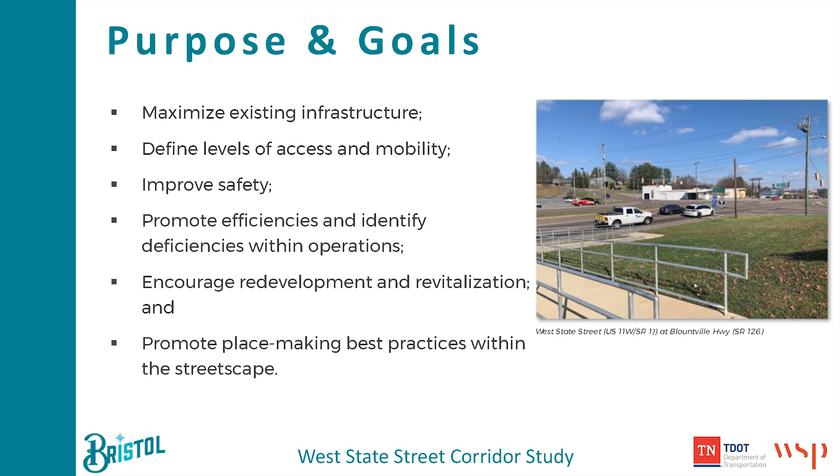All right, good deal. So next up, we're going to talk about the purpose and goals. So Bristol, when they were putting together the request for this funding, really looked at what they wanted to accomplish, including maximizing the existing infrastructure, defining levels of access and mobility, especially for alternative modes of transportation, improving safety for all users of this corridor, whether pedestrian, cyclist, or motorist, looking at ways to increase and promote efficiency, and identifying deficiencies within the operations of the corridor. That usually deals with things like traffic signals and turn movements, looking at the opportunity to encourage redevelopment and revitalization of West State Street, especially as you move outside of downtown and the in-between land between Interstate I-81 and the downtown core. And then also wanting to promote placemaking with best practices within the streetscape. What are the things that we're seeing in other communities that really work well to make streets functional and safe and also interesting for people?

Here's our next question, and I promise we will have more space between the next question. But you can see here we are asking you to choose a couple of options of your top 2 goals for West State Street. All right, answers are coming in.

I think this is particularly satisfying as someone who works with the public to see that sort of immediate response. I hope you all feel the same way. So redevelopment, streetscaping are the items that are kind of hitting the top of the list in the choice of options there. Looks like we've slowed down, so we'll go ahead and move on. But thank you all for participating. Like I said, we wanted to get a couple of these out early, and then we'll have some later on as we talk about our options. All right, let's see here. Yes, fantastic.

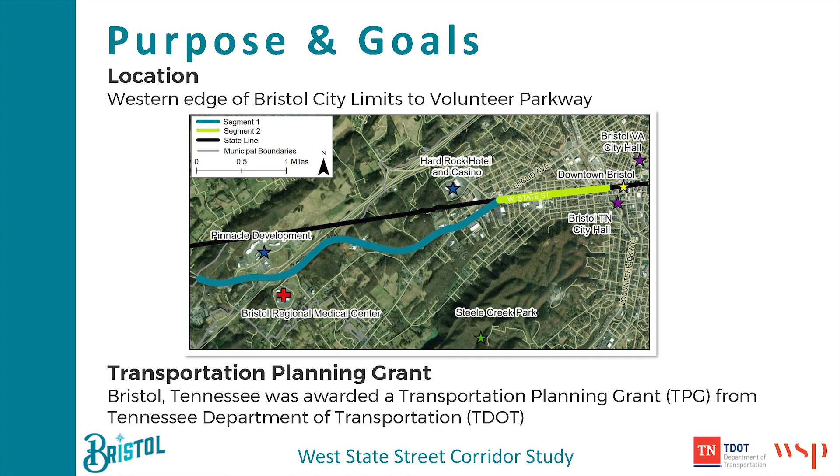That's a lot of acronyms, but when we refer to 'the city' during this presentation, we typically mean the city of Bristol, Tennessee. If we refer to Bristol, Virginia, we will try to note that. Similarly, that's how it is in the draft plan, which went up online earlier this week. So if you'd like some fun, not bedtime reading, we'd encourage you to look up the draft report available online for comment.

All right, just making sure I'm tracking on the right screens here. Give me one moment. All right, so we're going to jump into the analysis and existing conditions that we looked at for the corridor.

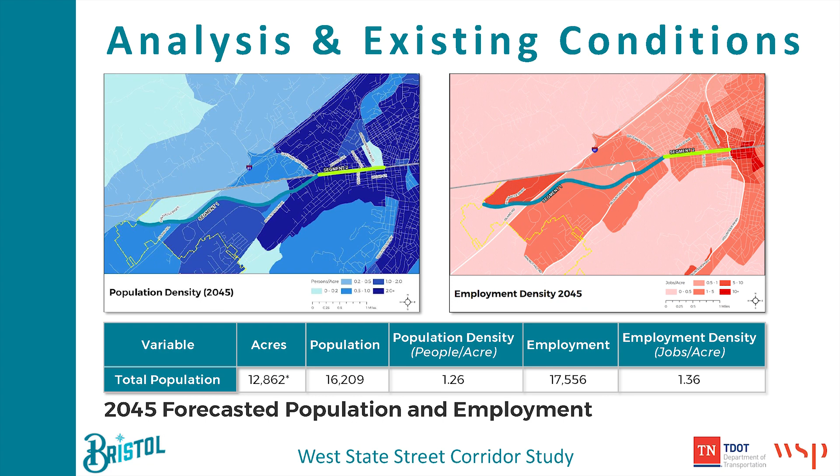And I assume also Virginia. But also for employment, we are planning to see an increase, going from just under 1 to just over 1 in terms of density. So you can see how that breaks down between existing population and future population.

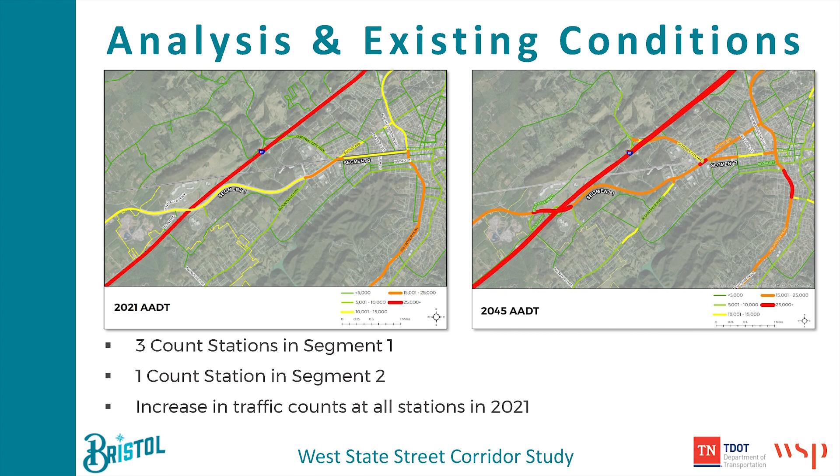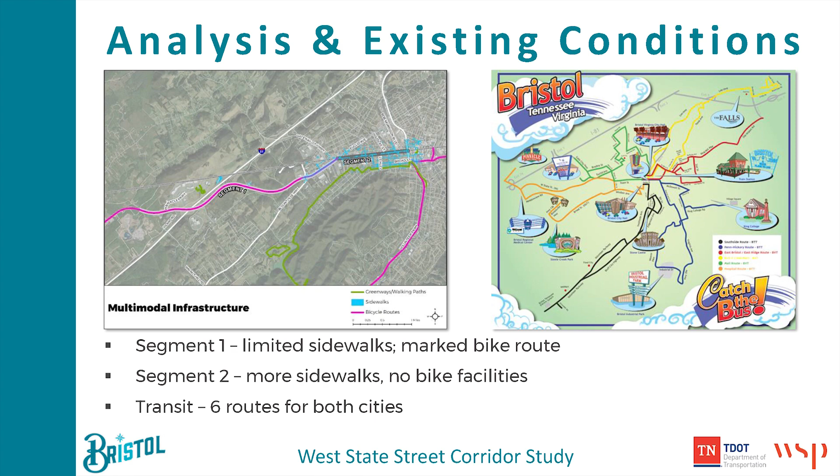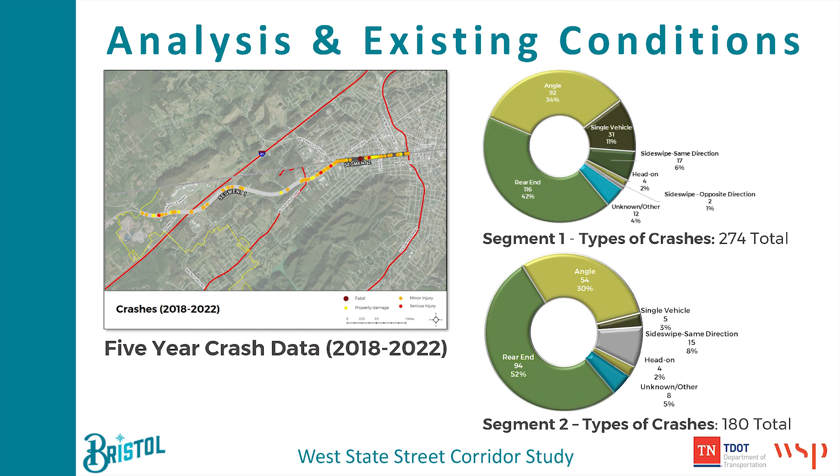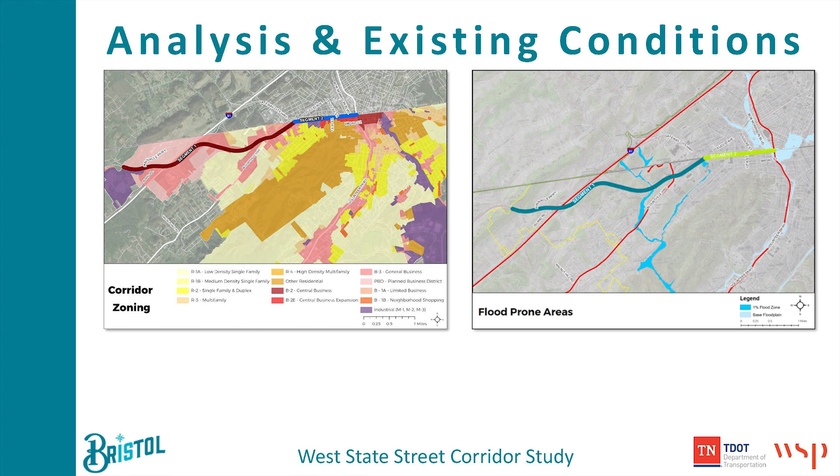You can see some of the water with some of the creeks, and also just the fact that Steele Creek Park is pretty steep, and some of that steepness follows segment 1 and can have an impact and limit development potential as you all consider future uses. So those were things we took into consideration as we looked at analysis and existing conditions.

All right, now we're going to turn to our public engagement.

We really appreciated both Sheriff and her staff working to bring stakeholders together. We met with them in late October of last year to talk about what they saw as opportunities and concerns for the corridor, and we had a great amount of participation from both city staffs, TDOT, VDOT, developers, business owners, Believe in Bristol, Advance Bristol, so a lot of good participation from a variety of folks.

They came to the table and said that what they'd really like to see is some more uniformity and character throughout the length of the corridor, increasing safety for bikes and pedestrians, making sure folks know where they're supposed to be and how to travel safely, making sure pavement markings are clear, visible, and intuitive — that was some of the commentary we heard.

And then there's a lot of aesthetic improvements that could be made, both in the public realm and also in the private realm with regards to mix of uses.

Parking was mentioned as an issue for segment 2, particularly crashes with parked cars. I think that ties into some of the marking issues with the street — sometimes people aren't prepared for how lanes shift, and therefore there's some confusion.

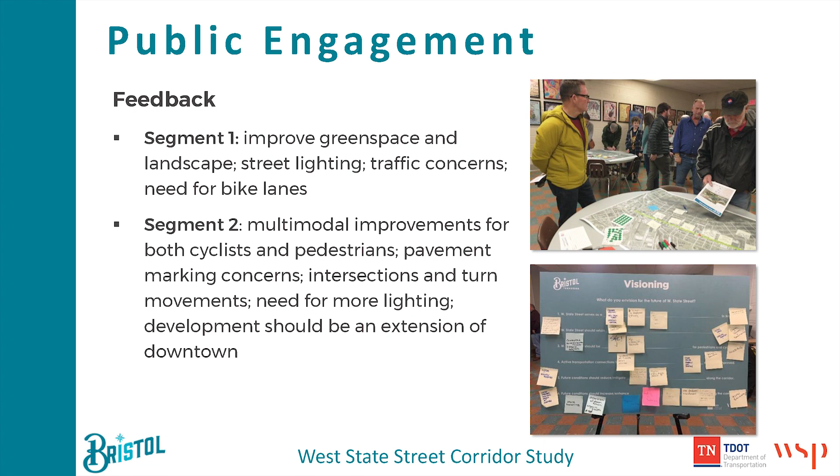And then in segment 2, multimodal improvements for both cyclists and pedestrians were highlighted. Pavement marking concerns — I think you'll hear that again and again. And then intersections and turn movements were somewhat confusing, so if there were ways to bring clarity to that. Again, need for more lighting, and then that development should be an extension of downtown, and you can see the image there in the bottom right.

It shows the visioning board with lots of different ideas added to those open-ended statements where people could share their thoughts and ideas about what should happen.

So with that, we actually went ahead and did an online survey following the public meeting, and that opened in February of '23, specifically the 13th, right before Valentine's Day. It was promoted through the open house back in November, and also on the city's social media, and we were thrilled.

We had almost 500 participants in that survey, and that's just great public participation, which really indicated to us that people care a lot about West State Street and what it can be and what it should be as a spine in this community.

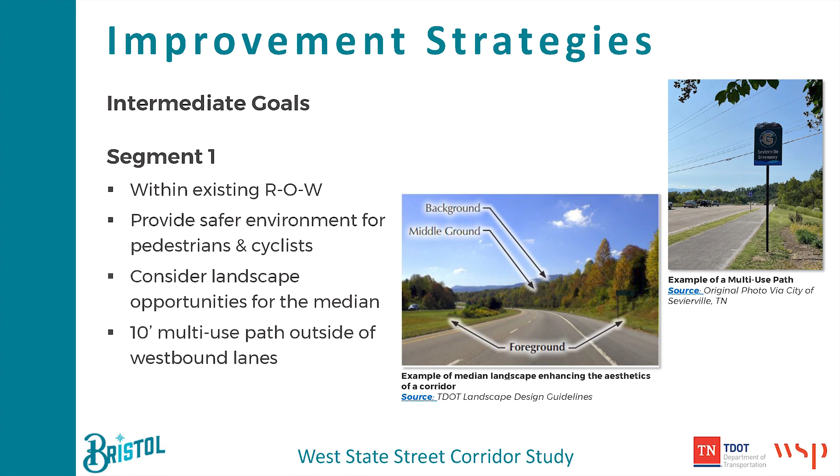As you dig through the plan, it's going to get super technical. In the body of the plan, we provide some illustrative plan sheets and cross sections developed in concert with our project engineer. We did not include all of these in the slide deck because you'd have to go through a bunch of plan sheets in the presentation, but everything's available in the appendix.

So essentially, what would a 10-foot shared use path look like along segment 1 that would allow not only movement of pedestrians, but also two-way bicycle movements? This is just an illustrative example of what it might look like near Pinnacle Parkway as you're heading eastward towards I-81.

And then again, what would that look like as you head towards Island Road? I think I'll breeze through these really quickly, but maybe give some love to that section right here.

If you guys can read it, I'm not sure if you can see it based on the resolution, but if you still have your Mentimeter up, the slide should automatically go to this slide that I'm on right now, and you should be able to zoom in. So you'll see 2 12-foot travel lanes, a grass median in the middle, 6-foot shoulders on the side, and then a 10-foot bi-directional shared use path separated from your vehicles, that are traveling potentially faster than the speed limit, by a buffer.

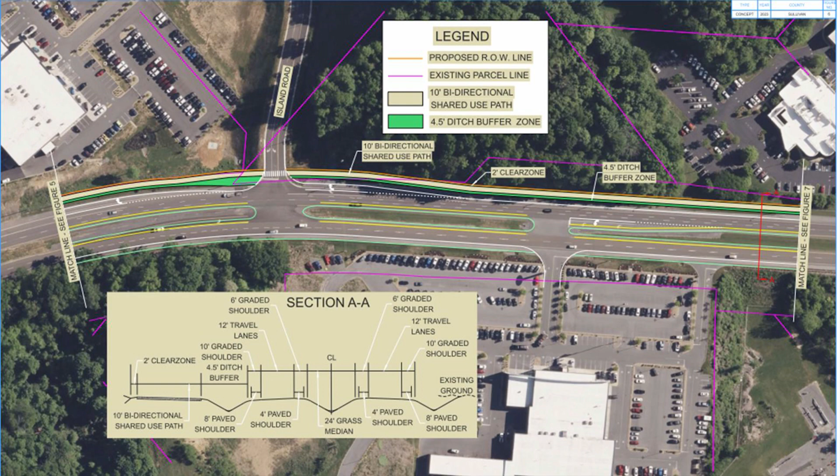And then in the project recommendations that we have as part of the study, we knew that the sidewalks begin on segment 1 of West State Street in and around that Toyota car dealership by Blountville Highway right there. We have a recommendation to kind of continue that shared use path through that. There's nothing that would preclude the city from weaving into the existing sidewalk that begins there, which would provide a little additional cost savings.

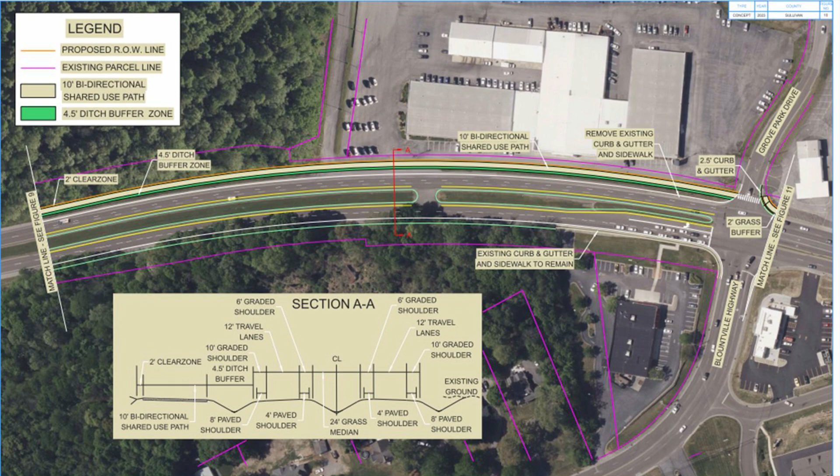Perfect. I guess I'll stop to see if there are any questions, comments, or concerns on how we're thinking about segment 1. I think you saw during the technical analysis, we're not expecting any significant traffic or congestion issues along that segment in the future, but what we did here was a desire to increase multimodal infrastructure along there while also retaining capacity. So implementation of a multi-use path that would allow not only your spandex riding bicycle riders, but also your families to get to the Pinnacle safely if they want to go for a bicycle ride. Does that seem intuitive to anybody? Does anybody have any questions, comments, concerns on that?

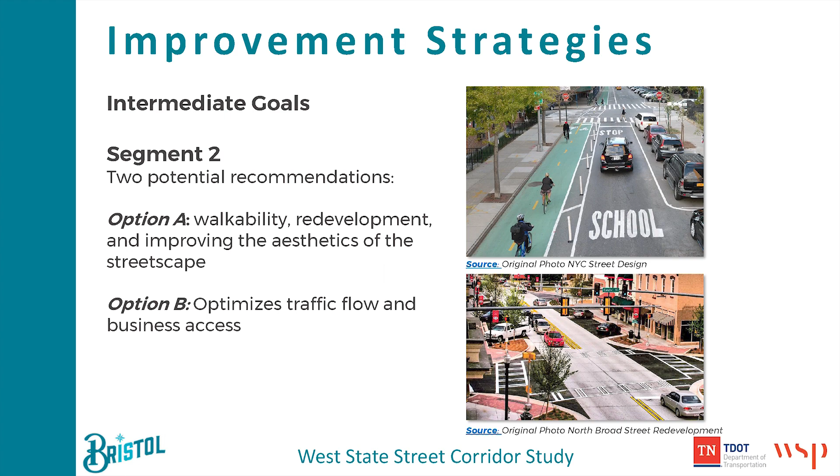So what you can see on the screen right now, there's only going to be one for option A and one for option B, is what that plan sheet and that typical section would look like. Again, this was a planning level effort, kind of the beginning of conceptual engineering, thinking about it, telling us whether anything we're saying can never happen, and rooting this in reality.

So what you see here is a retaining of the existing sidewalks along segment 2, or widening them to 5 feet if they happen to be narrower. Maintaining 2 through travel lanes in each direction that are 11 feet, which is typically feasible for your transit vehicles and freight vehicles, a little bit of a pinch. 10 is usually the minimum, 11 gives a little bit more love to your delivery vehicles and transit vehicles.

And then the most important thing, or the very different change as part of option A, is the implementation of what we call a 2-way cycle track along segment 2 of the corridor, which could then weave into the 10-foot shared use path in segment 1 as somebody heads westward. That 8-foot 2-way bike lane can serve bicyclists in both directions and would be buffered from your travel lanes by about 2 feet, so they can feel a little safer, a little less stressed driving on that type of roadway.

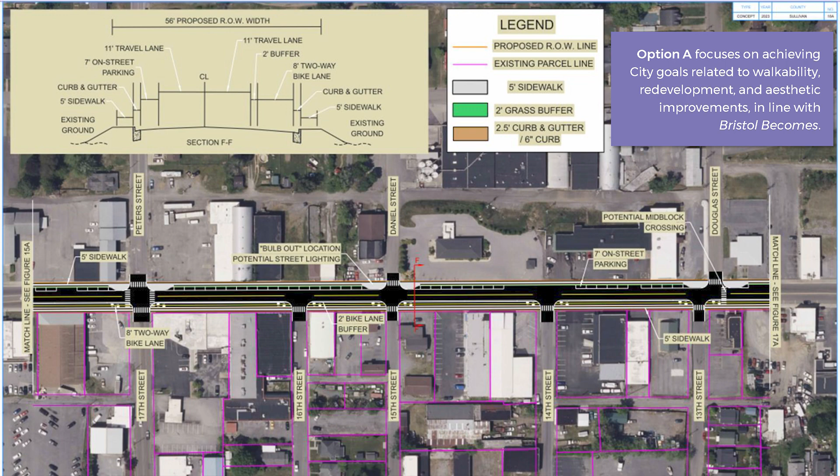All right, so what would your option B look like? Option B focuses on optimizing your traffic flow, making sure that your vehicles feel like they can reliably move through segment 2 safely.

And I would be remiss if I did not mention that both of these options retain on-street parking on at least one side of the roadway. We heard a desire to retain some on-street parking because people like to be able to park right in front of the door of the business they're trying to go to. So that's what that typical section shows right there, you can see the on-street parking.

And then you'll also see some strategic, what we call bulb out locations. They'll be in the gray on that area that you'll see. This is really an opportunity to provide landscaping, streetscaping, beautification improvements. You can provide ornate pedestrian scale lighting here, ground cover, colorful shrubs. You can work with TDOT's landscape design guidelines to tease out what that could look like in the future.

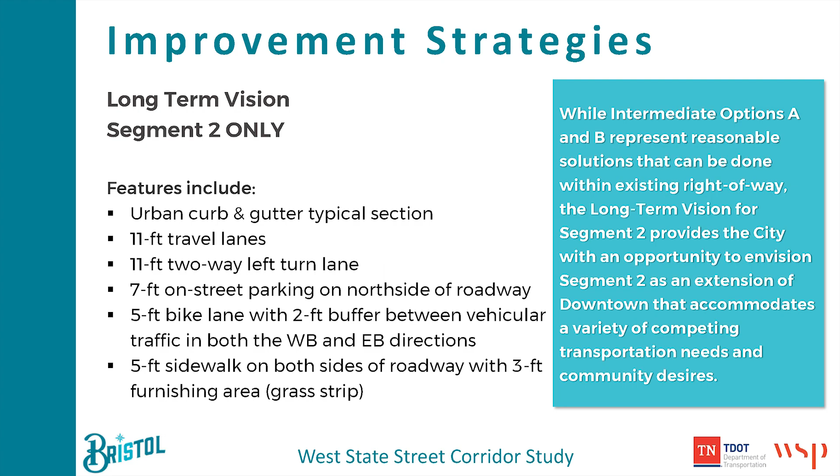So that's what it would look like here. You can see the typical section, the center turn lane with the 2 travel lanes in each direction, buffers to your bike lane. It might be a little hard to see, but it is in the report online, as well as the sidewalks, which would now have a buffer before the curb and gutter.

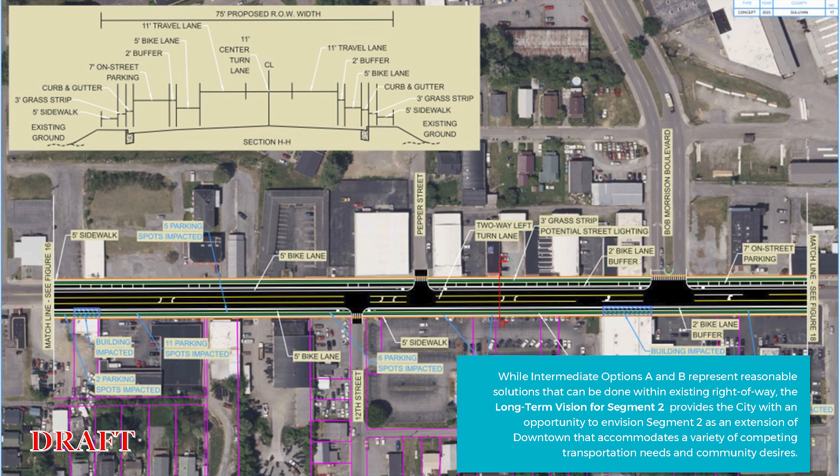We're good. And then this is essentially what that would look like as you approach Euclid/Gate City. We do retain some of that on-street parking.

This obviously would not preclude the city from maybe saying, hey, we don't want all those parking spots. Maybe we want to have a landscaped bulb out right there. We want a beautification opportunity. We want some pedestrian scale lighting. Let's take out one of those on-street parking facilities and put something there. Street furniture is another option.

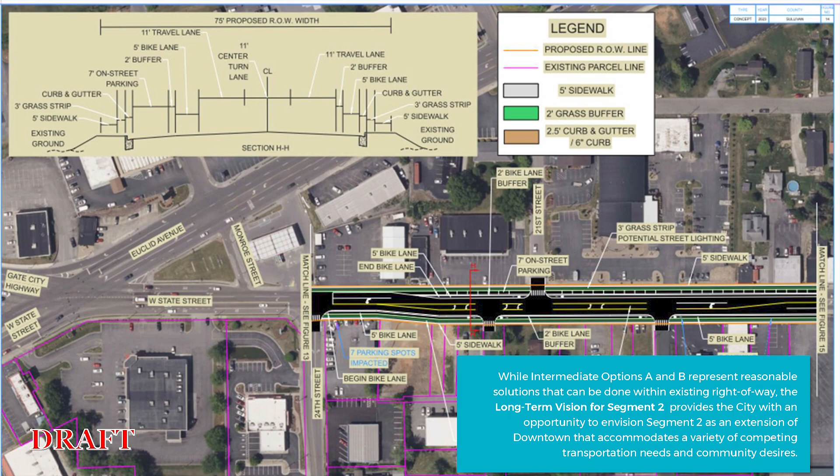And then the thing that I think might blow people's minds. So one of the limitations of the study we conducted is we did not conduct formal traffic analysis or PE, aka preliminary engineering, as part of this. But we did work with a project engineer to ground truth some of the ideas that we were thinking about.

We heard some desire for a roundabout at that current offset intersection that separates segment 1 and segment 2. And we thought, our project team and advisory team, what would it look like to implement a roundabout? There's national research that your traffic flow and reliability of intersections with roundabouts is not necessarily compromised as opposed to a signal.

So what you see here is what that roundabout would essentially look like. It's essentially a yield motion in each direction, including having all of those crosswalks as well as median refuge islands given the width of the roadway right there.

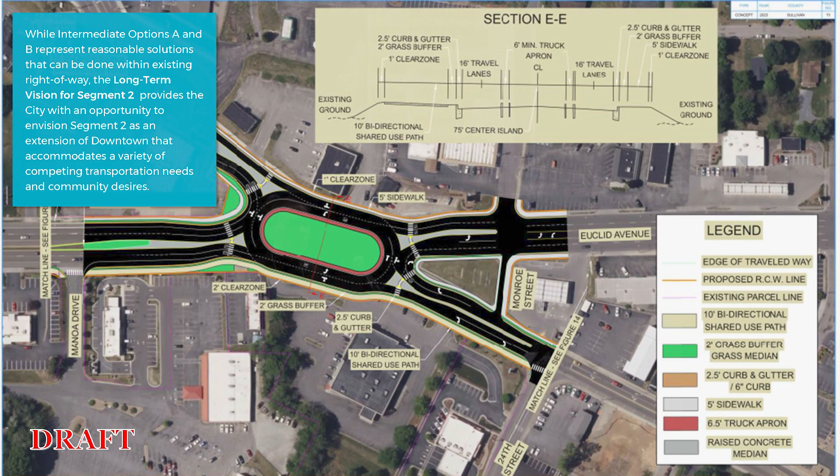And this is also a great opportunity to have some sort of gateway feature similar to the sign downtown, whether you want some sort of public art feature, another signage feature, or just a more naturalistic approach where you can use some landscaping, trees, ground cover, things like that.

And before I get to next steps, any questions on what we just threw at you in terms of recommendations? And before anybody raises their hand, I want to say there's not necessarily a preferred alternative coming out of this, right? What's coming out of this is option A, option B, the Cadillac version, right?

How can we start fostering consensus in the community, right? And we can use this as leverage and a starting point for that conversation. So yeah, with that, I'll take any questions on the recommendations before we go on to next steps.

Hey, if nobody else is going to say anything, go for it. I like the creative thinking about the Gate City Highway intersection, whether or not anything happens with it. I like creative thinking.

I am wondering about any recommendations on how to go about achieving a 75-foot right-of-way in an area that's currently more like 45.

Repeat it, you said? Yeah. So the question was essentially, how do we get to acquiring more right-of-way than we currently have? I think that's a long and tedious process, right?